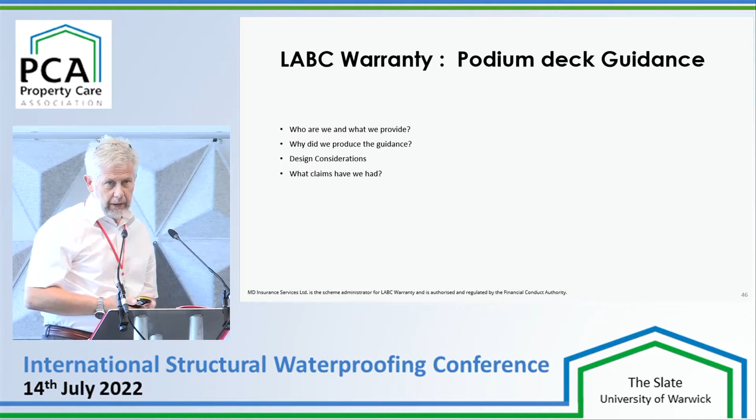Hope you can see that. I was told that you could, and when I was shown the pictures of the presentation, there was supposed to be other video machines over here, so I hope you can see it, so I'll ad-lib.

Just to give you some background, MD Insurance Group was founded back in 1997, and the LABC warranty brand was brought in 2007. Collectively, we're the second largest structural warranty latent defects provider, with over 30% of the UK residential sector warranty.

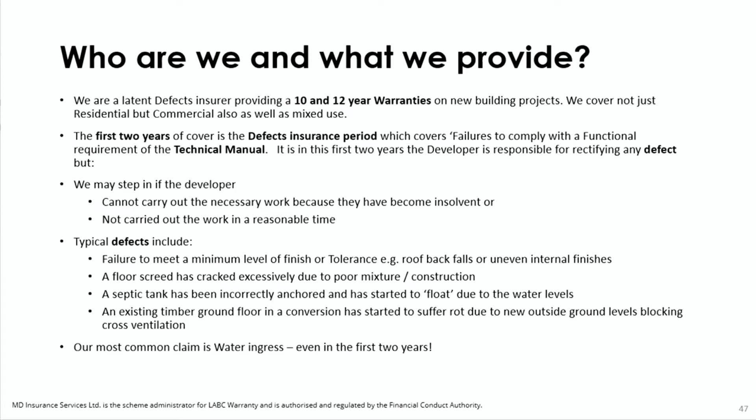As I say, we're a latent defects insurer, and we provide 10 and 12 occasionally warranties on building projects. The first 2 years is known as the defects insurance period, where technically the developer should come back to rectify any defects. We may step in, but typically, the most important point is that I'd say 80% of all claims are water ingress related.

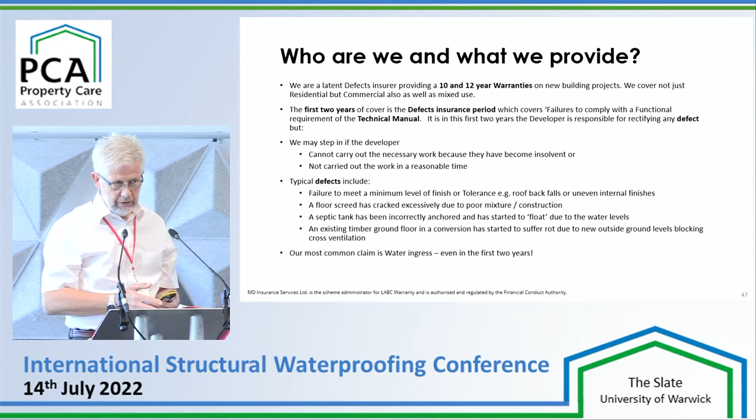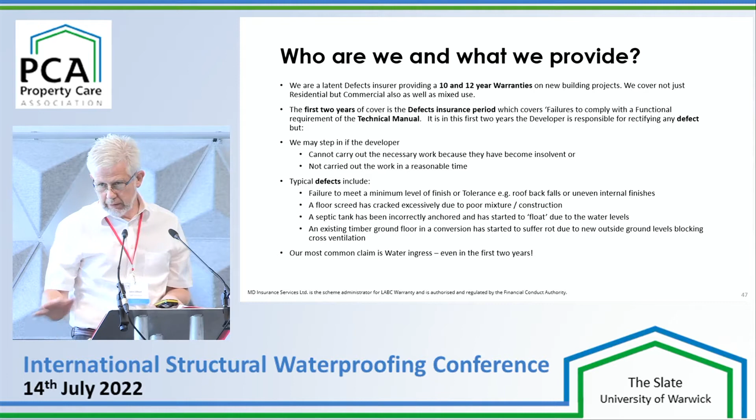But we do get other claims. A lot of them are to do with finishes, tolerances, that sort of thing - internal finishes and external appearance. Floor screeds that crack, septic tanks that aren't held down properly and start to rise up. And even on conversions, we can get situations where new floors go in, but some floors are left with timber, and the cross ventilation is accidentally forgotten about and can be blocked, say on one side where they put new car parking, and consequently everything rots.

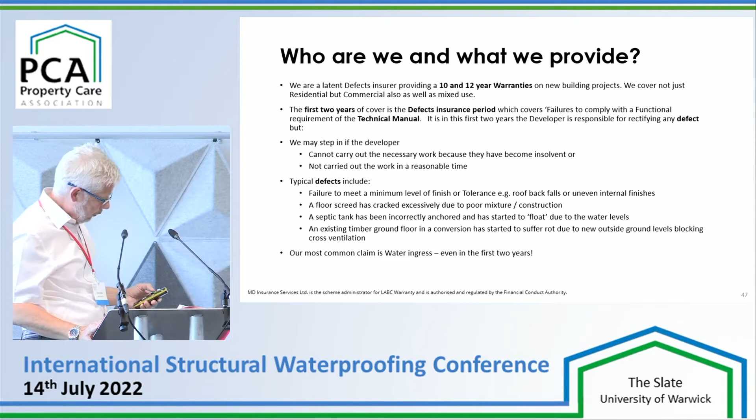So this describes what might happen in the first 2 years, what we cover, based on defects of the technical manual. The technical manual that I'm responsible for - I've forgotten to mention I'm the technical standards manager, so I actually write the standards. The manual is currently 466 pages in total, covering a wide section of different areas of work, from foundations, basements, ground floors, external walls, roofs, etc.

I have to point out that whilst all work is expected to meet building regulations, warranty is different in that we provide cover should something happen post building control sign-off, because after that sign-off, they're done. You won't get redress in theory from building control, and it won't be something covered probably by your household insurance either.

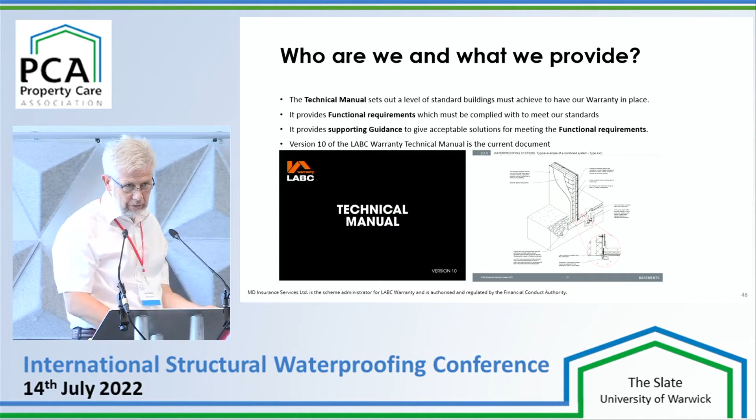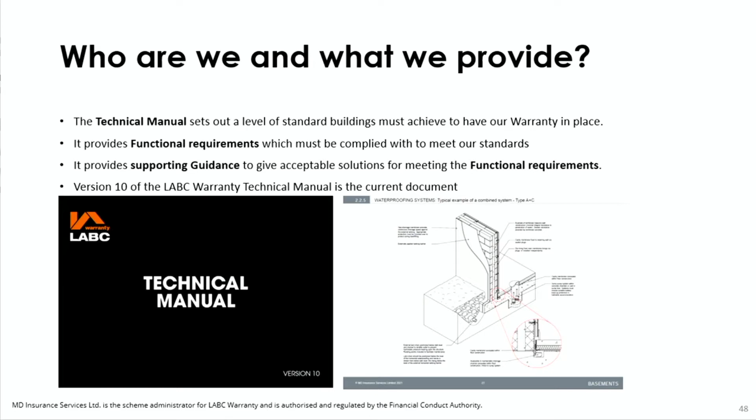So the picture there just shows a typical cover of the most current version of the LABC technical manual. And just so you're familiar, I've shown you something from section 2, which is the basements area.

We also go into the remainder of the 10-year warranty, which is years 3 to 10, basically the structural insurance period. That's where any claims are covered by major damage, and at this point the developer isn't on call to deal with it - it's the warranty.

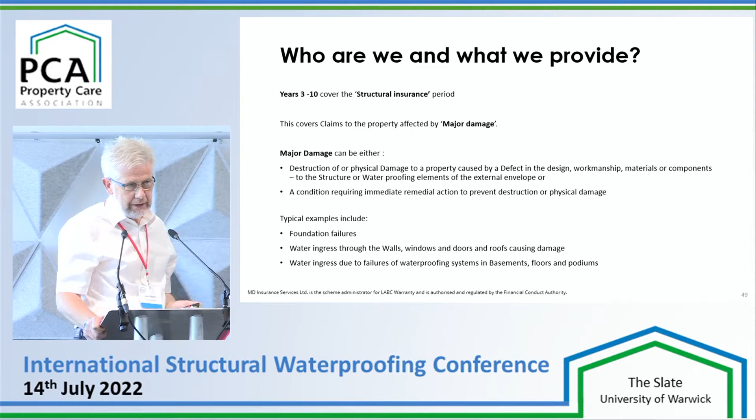So when we talk about podium decks leaking and everything else, in years 3 to 10, we don't want to be there having to fork out for the expense of getting it right. So what we're trying to do is put these standards together to enable our experience from claims to be known right from the start, and hopefully we can all work together to get a defect-free project.

You'll have noticed the heading is, why did we produce the guidance? The reason really is that we provide a warranty cover, and we require the designs and the finish work to be constructed to a defect-free standard for at least 10 years. Also, mortgage lenders that provide mortgages on buildings will expect up to a 60-year service life requirement. So there's a lot riding on getting these projects defect-free.

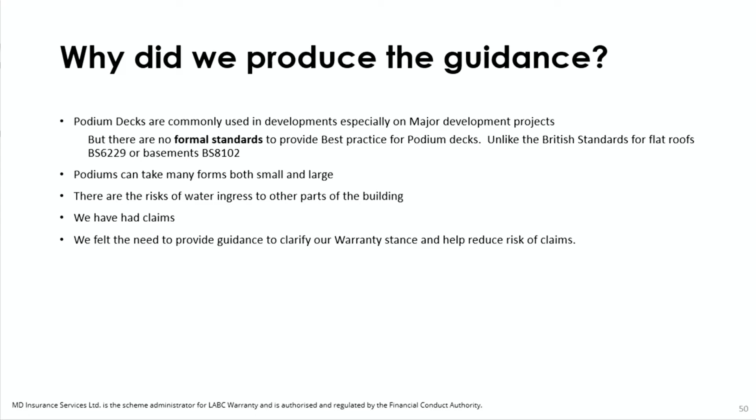Podium decks are obviously, as has been explained by the previous two speakers, commonly used now on developments, but until just recently there haven't really been any formal standards to provide best practice. And as we've already seen in the previous slides, they can be in many forms, very large, and for us there is the risk of water ingress.

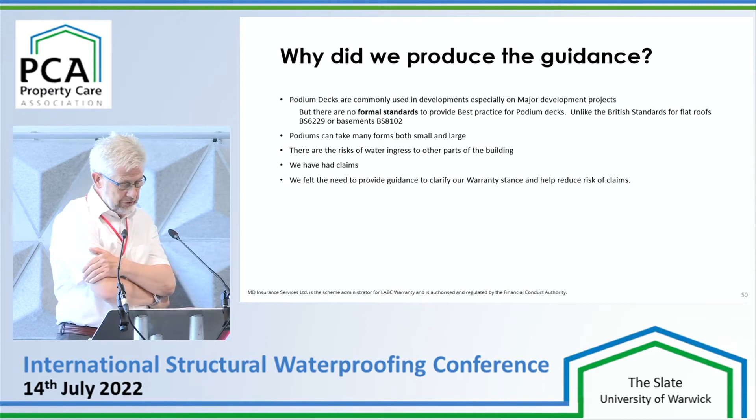We have had claims, and I will show you a couple of slides of one particular claim. I'm not going to labour it, because we all know that claims happen. I'm also going to show some positives where work has been done well. But we felt that we needed to provide some guidance, and hopefully the introduction of the podium deck guidance, which is now in the manual, is helpful to you.

So what we did, we introduced this guidance to start off with on our website, and then we introduced it into section 11 of the technical manual.

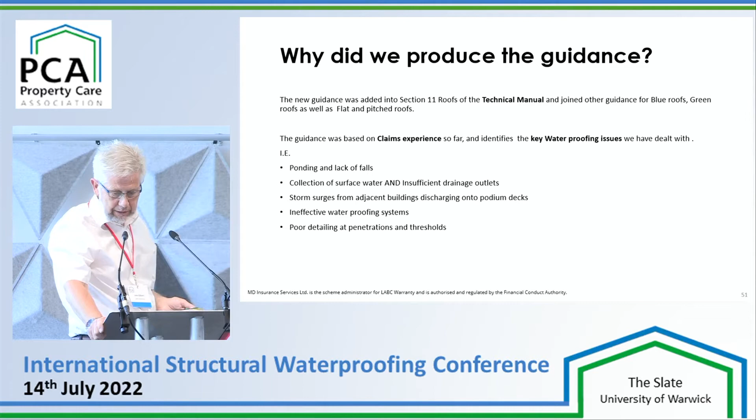It was based on claims experience, and we needed to identify the key waterproofing issues, which again has been mentioned before. So it's mainly these areas: ponding, lack of falls, collection of surface water, and storm surges can often have a problematic effect on things, and I'll show you that in one of the slides in a moment.

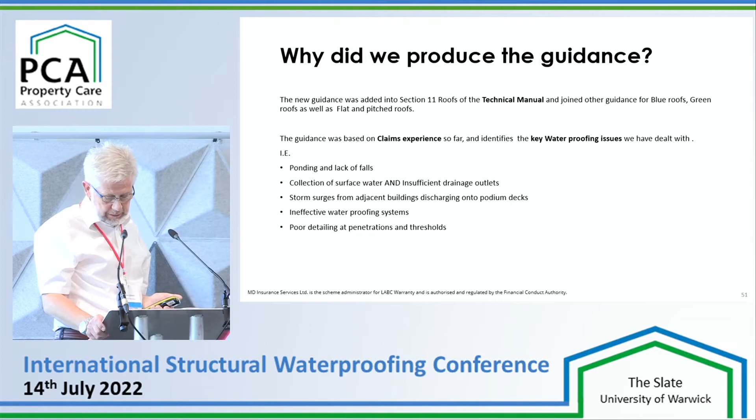Ineffective waterproofing systems - well, that can be related to poor detailing as well as the actual specification of the materials. We have found in the past that some claims have had perfectly good materials used, but they've been used out of scope of the third-party product approval.

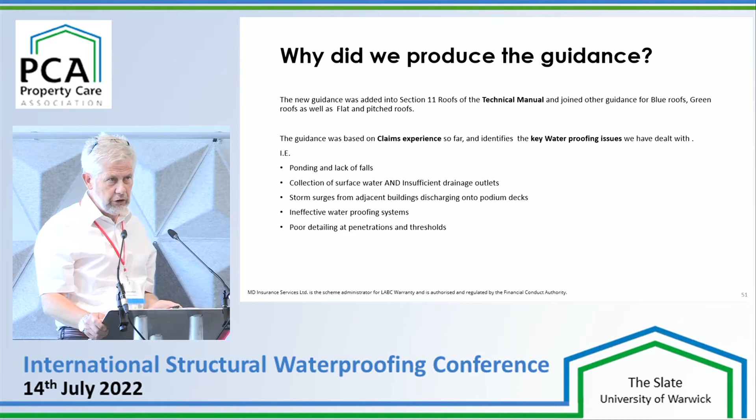So that's something else we need to be careful about, and you need to be aware. If you get something that's got a third-party product approval, BBA, BDA, or whatever, read the scope of the document first to make sure you're using it as they tested it.

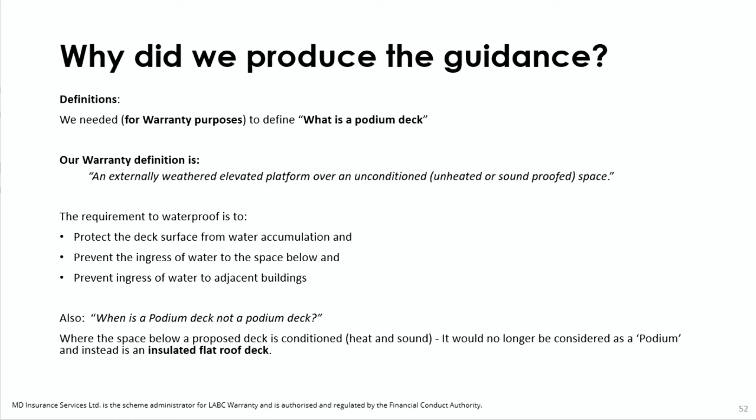We also needed, for warranty purposes, when we wrote this document, to give a definition of what a podium deck is. My colleagues who have been dealing with podiums for some time, and the industry experts, all helped us together, and we tried, and we've put down the following definition: it's an externally weathered elevated platform over an unconditioned, unheated or soundproof space. I prefer something plain English, but that's what everybody agreed upon in the end.

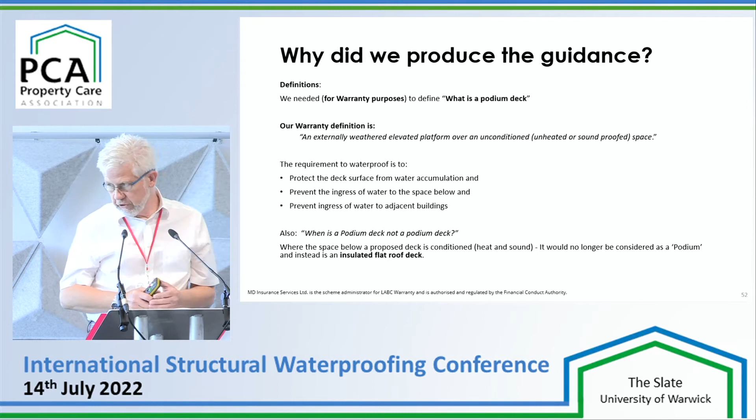We also wanted to identify what isn't a podium. So that's obviously where below the proposed deck, it's conditioned, it's heated, or sound.

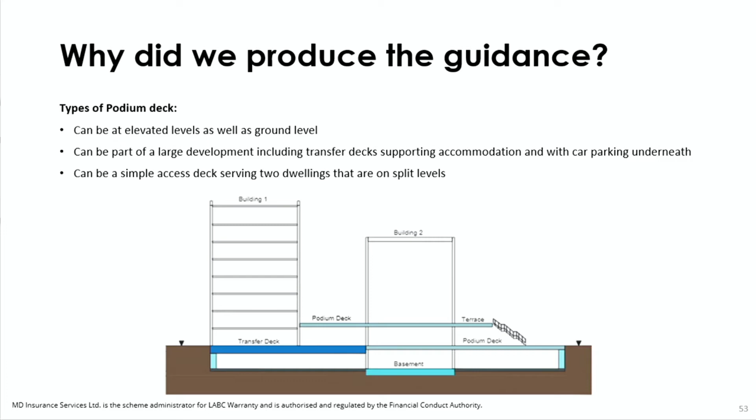We put this little detail together, but it's remarkably very similar to something that the previous speaker put together on this cross section. But it just tends to try and show where podiums could be. A podium can carry on to be a transfer deck, and it's just to give a description of what we think, where a podium is in play.

Where it's obviously above a below-ground car parking space, we would be seeking also guidance from BS 8102, which has been mentioned before, to ensure the correct environment is achieved.

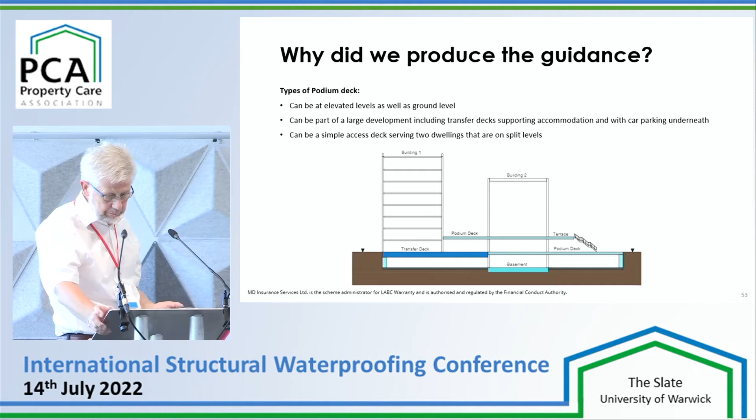I changed the heading here to design considerations, because this is where most of the problems start so far as when we are dealing with projects.

And it's quite often said, the contractors will say, well, what do you want? We're not here to design it for you. We're just here to identify that we cover these things, we get involved with claims, and from our experience, we feel that a project is better managed if we get enough proper information right at the start, and we can recognise who's involved and who's taking responsibility.

It's targeted. The guidance is targeted for the clients, the designers, the architects, engineers, the subcontractors, to provide enough information to us so that we can identify if it represents a standard risk to us.

We've set up at our office now a system that when new projects come in for warranty approval, before it even goes to our warranty surveyors, two of our guys will look at basement proposals to identify if it's a standard risk. And I have to say, probably 60 to 75% of the stuff that comes in initially to warranty gets thrown back for lack of information.

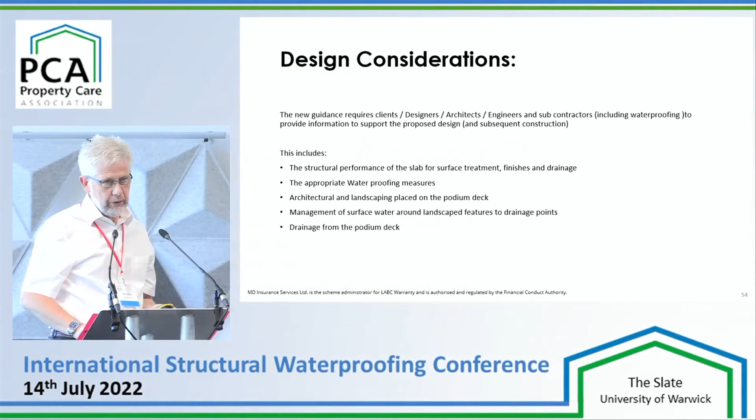So we've identified the sort of information that we really, really want: the structural performance of the slab, what waterproofing measures are going to be in place, the architectural detailing, management of the surface water, and the drainage. And I'll mention or show some situations where that's either been done poorly or not, later on.

It needs to be justified. And podium decks have taken on a similar way of looking at to basements in that respect.

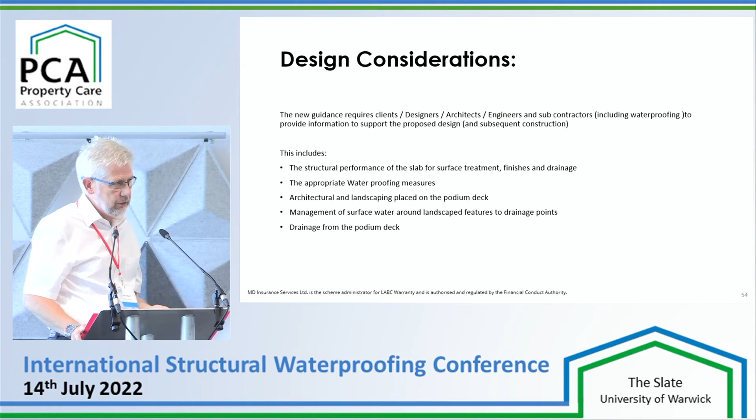Still under design considerations, as I say, we've had claims, and we use a term called causation, which is, yes, there's a claim, there's water coming through, but what's caused it? That's the bit that we hang our hats on. What's caused it? And most of the causations relate to these points here. So waterproofing around penetrations, abutments, threshold detailing, again, that's been mentioned before.

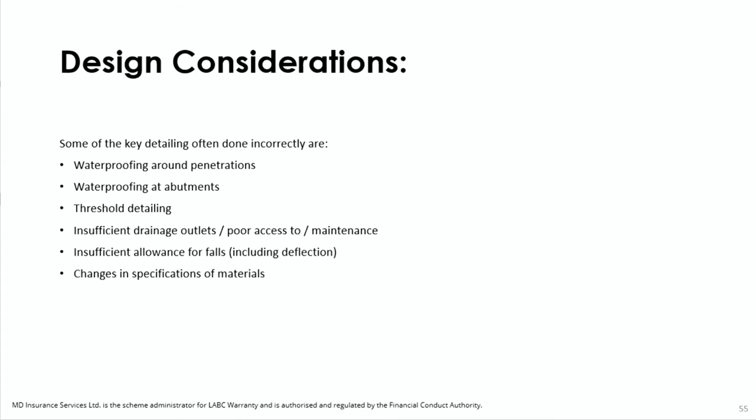Insufficient drainage outlets, quite often because they were designed right at the very early stage, but they didn't take into account the deck actually deflecting. And even though the slab itself may have been level tested, as soon as the deflection and the waterproofing goes on, you suddenly see low spots.

And the last point here, changes in specifications of materials. It's one of our biggest problems. I'm sorry, you know, it's happening all the time.

Often, and I probably don't need to say this, but the waterproofing proposal is sought very early on by the architect from a waterproofing supplier, and then once the project proceeds, costs get looked at. I don't know if there's any QSs in the room, but bless you. But suddenly changes in specification occur, and problems can occur which can put at risk, for warranty provision anyway, what happens next. And we really need the justification for any changes in specification so we can offer a warranty sign-off.

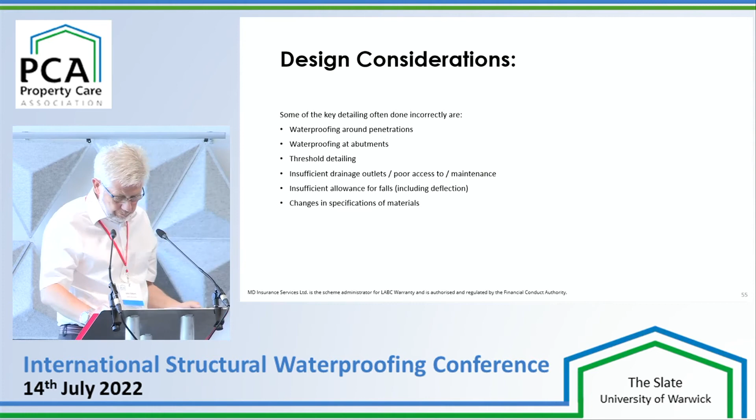Again, you've probably just seen something similar. What I'm going to say here is that we put together these details because we have had a couple of situations where these kickers, the turn-ups, have been forgotten about, and where you've ended up with defects in the waterproofing. They've continued on into the floors of the accommodation. Such a simple thought, but it's something that does happen.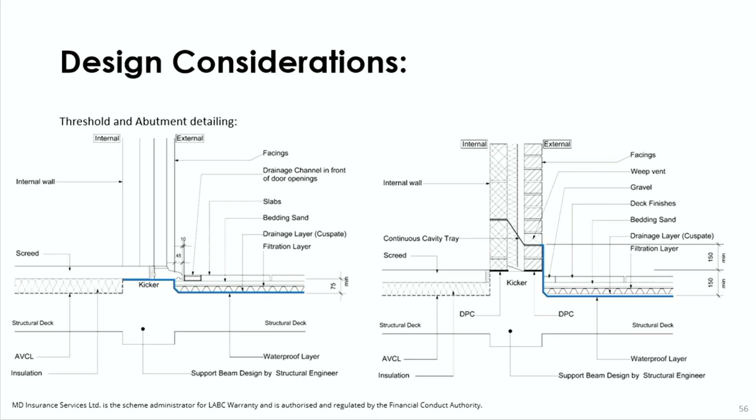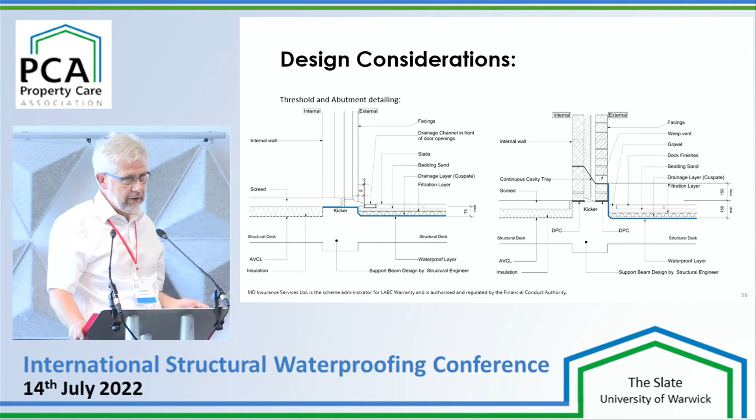Also, we have had situations where, unlike one of the previous slides, if I can just show you this one, architects and their design wishes, sometimes they don't want a visible upstand or flashing, and so all they want is that to go up there, but they forget that the lovely clay brickwork in this position here isn't particularly frost resistant or suitable for that area. So sometimes we just have to be aware of the minute changes or design things that could cause a problem later on.

Okay, so what claims have we had? Am I all right for time? Oops, right. We do get claims. I'll be quick on this one.

This is a development of 2- and 3-story residential buildings constructed over a podium deck with a basement car park underneath. The car park is actually virtually under the whole area of the development. The ceiling of the car park is reinforced concrete, which is great. The claim is penetrating water is causing a nuisance and damage in the car park, and in the stairwells. The volume of penetrating water is worse in heavy rainfall.

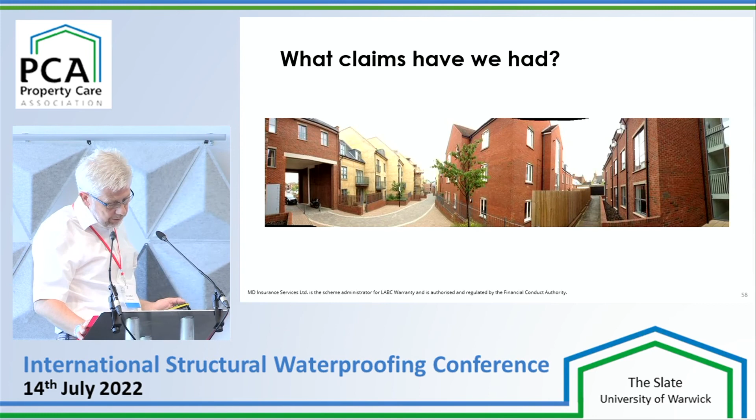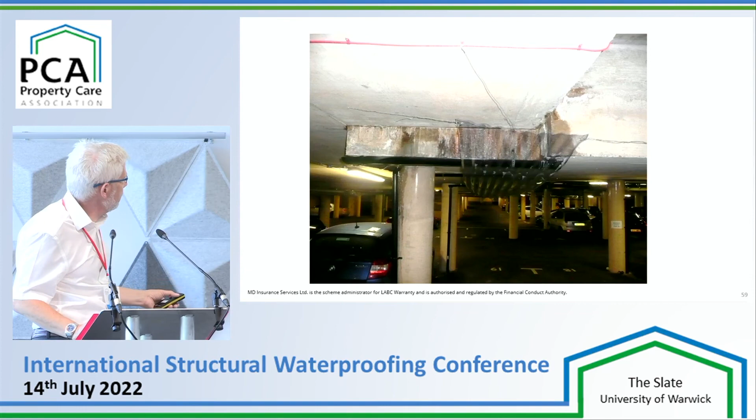The causation, that term I used before, a lack of surface water drainage has been provided, and it results in free water being stranded, and it breaches any of the preformed or post-formed penetrations. Similar to some of the details before, attempts have been made to capture the water. What wasn't shown, if you imagine your Porsche or your Audi TT is parked underneath one of those, you wouldn't like that. Again, some Heath Robinson attempts to capture it and discharge it into some temporary guttering.

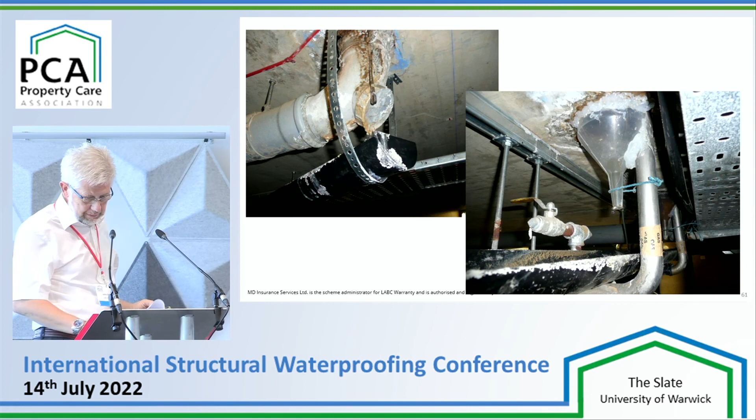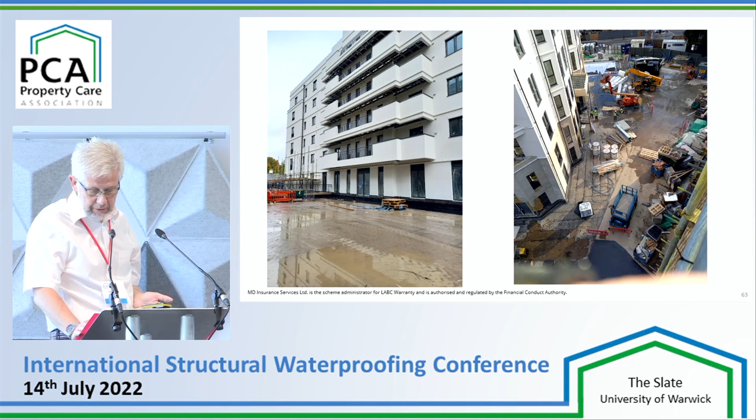I'm racing forward now. But, as I say, it's not all bad, and that is being dealt with. So what we then have are some particularly good, well-managed projects. This example is in Bournemouth, and it consists of a giant basement car park with 3 blocks on top, one of them being a well-known hotel. If you think colour purple, you might know what I'm talking about. Good detailing and workmanship were in place, although there were still some last-minute solutions, but these were worked through with our surveyor.

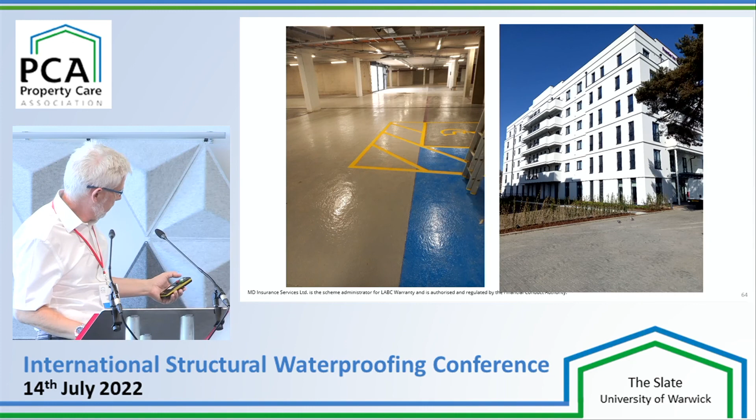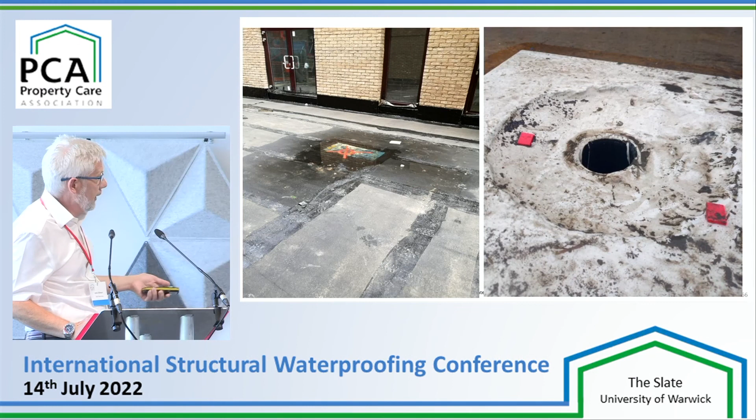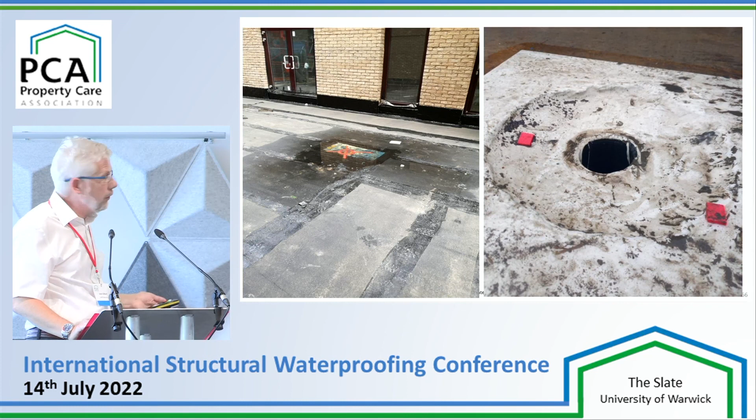This is the underside, showing part of the ground floor, and on the right is one of the finished blocks with the landscaping completed. And I promise there are more good jobs, so it's not all doom and gloom. As mentioned before, you might get the slab done correctly, but only a spot of rain will help to identify if there's still some low spots. In this particular case, they were marked out, and the remediation was to provide additional outlets. You can see an outlet here that has been correctly installed below the level of the main waterproofing.

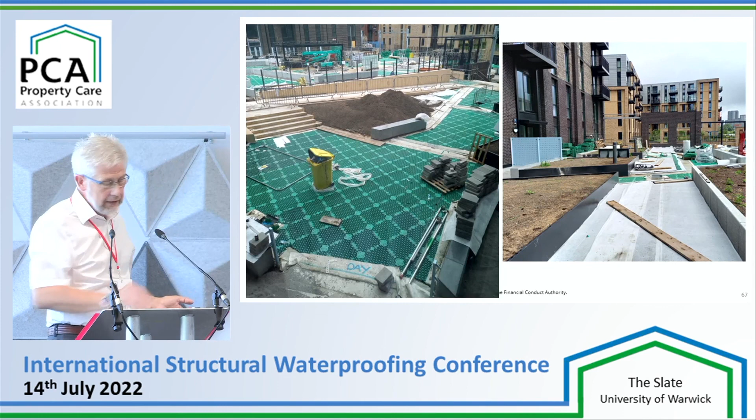The next slide, you can see the attenuation system now being put in place, and you can just see some of the flashing details here, but again, it's a secondary thing because there's also another waterproofing that goes through to the inner leaf that was explained before. And that's the finished project.

Am I still okay? Oh, she's giving me that sign now.

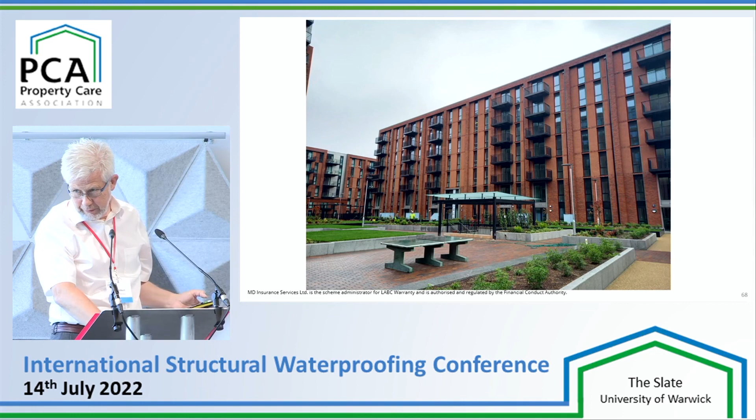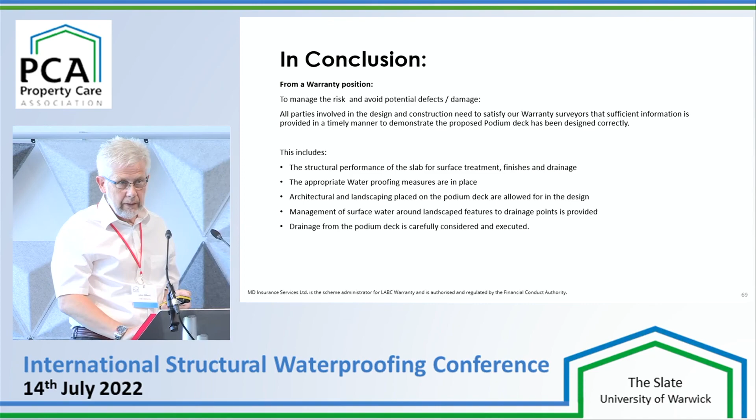So I'm just going to give you a conclusion. For warranty purposes, please ensure that you provide enough information at an early time. And if there's any learning from experience that we can offer you, more consideration must be made for providing additional outlets due to deflection. Make sure the landscaping doesn't interfere with falls. Ensure that on tight sites damage is avoided when you're using it as temporary storage or loading areas. And that's it. Well done.